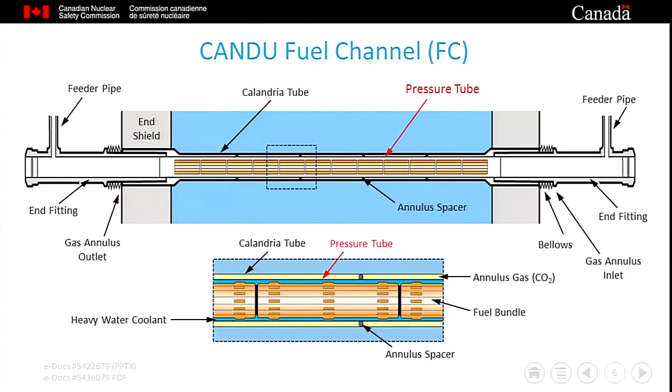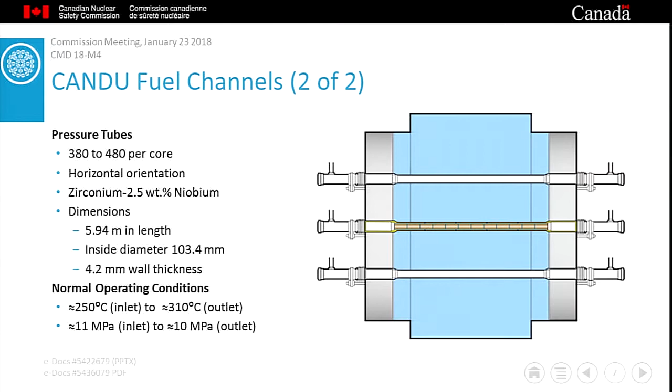The number of pressure tubes varies from as few as 380 in Pickering B units to 480 in the Bruce and Darlington units. Please see the appendix for more details about Canada's CANDU fleet. The conditions under which pressure tubes operate also vary according to the vintage of the reactor design, with lower temperatures and pressures in early CANDU units like Pickering A and higher values in the Darlington units.

First off, my apologies for the typo in this slide. I must have missed this. It's supposed to read technical concepts.

Before proceeding to a description of the pressure tube degradation and how CNSC staff regulates safe operation, I'd like to review some key concepts. Any conversation about pressure tube technology will touch on a number of interrelated themes. But rather than review all of them, I will touch on three. By doing so, I hope to offer some context for today's presentation, as well as prepare the Commission members for discussions they may hear during the upcoming Bruce and Pickering Part 1 hearings.

In the next few slides, I will briefly address three concepts. First, what do we mean by the phrase fitness for service? Second, I'll quickly discuss the presence of hydrogen in pressure tubes and the uptake of its sister isotope, deuterium. And finally, in any discussion about pressure tubes, people will frequently refer to two units of operating time, and I'd like to clarify the distinction.

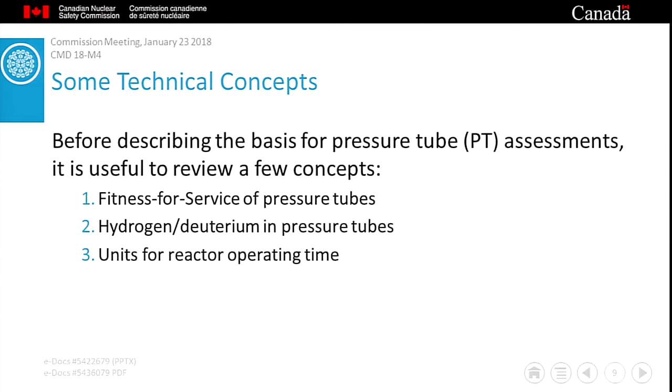The first concept is pressure tube fitness for service. In a CANDU reactor, high-temperature pressurized coolant flows through a number of components, collectively known as the primary heat transport system. Because this system is responsible not only for collecting heat from the nuclear reaction, but also efficiently transferring heat to the secondary system via steam generators, the integrity of the primary heat transport system is vital. This is especially true of the pressure tubes, which contain hot fuel. The CANDU safety case relies on pressure tubes to remain leak-free under normal operating conditions and to maintain fuel cooling under postulated accident conditions.

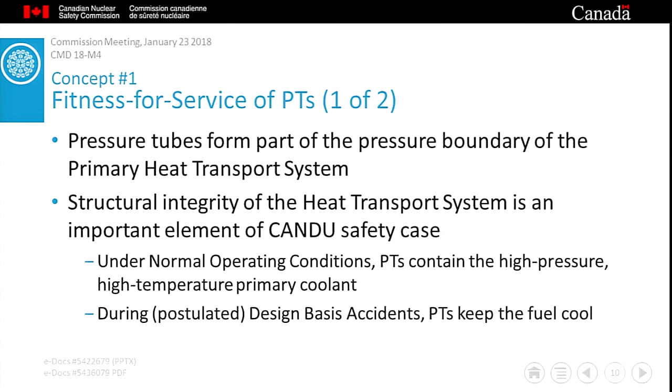When CANDU engineers designed pressure tubes, they had a specific goal in mind. Over their lifetime, the tubes would exhibit an extremely low probability of failure, irrespective of whether they were subject to normal operating conditions or accident conditions.

With this in mind, the engineers incorporated redundancies into the pressure tube design. First, they designed the pressure tubes not to leak. However, bearing in mind that pressure tubes might experience in-service degradation leading to a crack, the designers deliberately incorporated features to make pressure tubes resistant to unstable cracking.

Once pressure tubes have been fabricated, installed, and commence operation, one might ask, can they still perform the way that the designer originally intended? So when staff reviews a licensee's fitness for service assessment, our goal is to answer that question. Before leaving this slide, I'd like to clarify the phrase in-service degradation. For the rest of this deck, I will use it to describe degradation that occurs as a result of reactor operation.

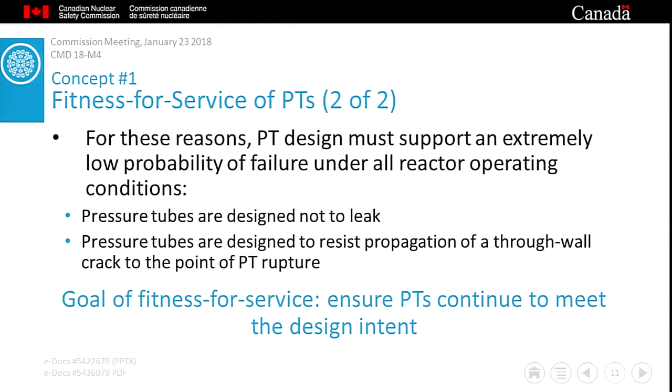At this point, it's important to distinguish between the 2 types of pressure tube assessments that CNSC staff review. First, assessments that are done to confirm that inspected pressure tubes are fit for continued service. In accordance with their license condition handbook, a licensee is obliged to conduct periodic inspections and compare the results against CSA acceptance criteria. If the inspection finding does not meet those criteria, the licensee must submit a fitness for service assessment for the inspected pressure tube for CNSC acceptance. These assessments cover approximately 30% of the pressure tubes in service in Ontario.

In addition, CNSC requires that licensees perform pressure tube risk assessments to address the 70% of tubes that have yet to be inspected. These assessments include 2 that I will describe in more detail in just a minute, namely leak before break assessments and fracture protection assessments.

Both leak before break and fracture protection assessments start from a worst-case assumption that somehow a crack has occurred in a pressure tube without operators being aware of it. The licensee then calculates the probability that the hypothetical pressure tube will rupture. All of the assessments must meet the acceptance criteria established in the compliance verification criteria of the License Condition Handbook. Based on the results of these assessments of both inspected and uninspected pressure tubes, CNSC staff assembles a composite view of the safety of 100% of the core.

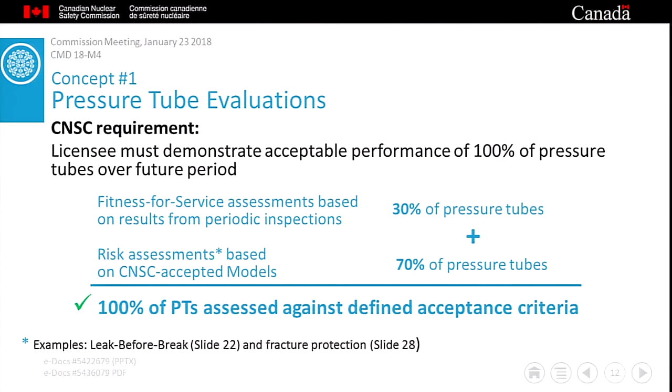As a second concept, I'd like to discuss hydrogen and deuterium in pressure tubes, because we'll see that this is an important issue in the concept of fracture toughness, which we'll be discussing in a minute. While there are 3 hydrogen isotopes, only 2 of them really have an impact on pressure tubes. Hydrogen, whose chemical symbol is a capital H, is built into every tube during its manufacture. And deuterium, symbolized by a capital D, is picked up by pressure tubes when they're in contact with high temperature heavy water.

Corrosion reactions result in two things. First, a thin layer of oxide appears on the pressure tube surface, and second, a small amount of the deuterium from the corrosion reaction finds its way into the tube. The amount of deuterium is so small, it is reported in parts per million. For simplicity, rather than talking about a given pressure tube having so many parts per million of hydrogen and so many parts per million of deuterium, industry rolls the two into a single value and talks about the hydrogen equivalent concentration, or HEQ. So for the rest of this presentation, you'll hear me talk about HEQ.

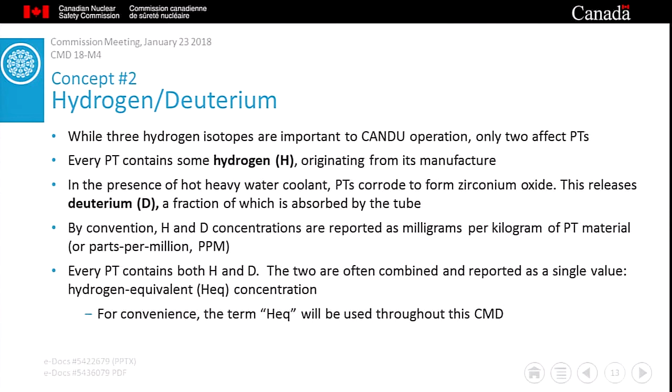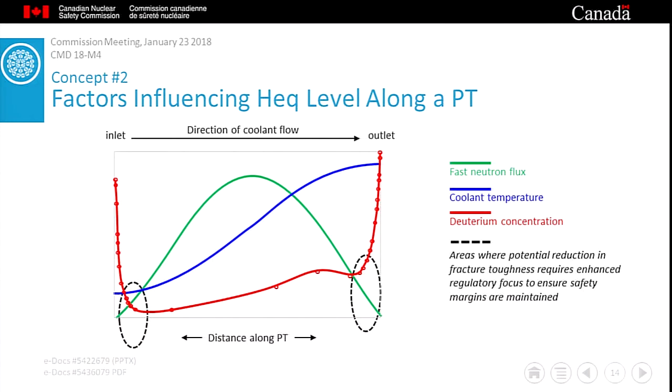Knowledge of this behavior is important for pressure tube assessments. In particular, hydrogen equivalent concentration is a key parameter for establishing the fracture toughness of a pressure tube. Hence, the circled areas at the end of the pressure tube indicate places that require enhanced regulatory focus because of reduced fracture toughness. And I'll be giving you much more detail on that in a couple of slides.

Finally, I'd like to distinguish between two units of reactor operating time that Bruce and Pickering representatives may use during the Part 1 relicensing hearings. Hot hours, which is the cumulative time the primary heat transport system is above about 200 degrees C, and effective full power hours, which is the fraction of the hot hours when the reactor is at full power. Each of these units has a slightly different application. To illustrate the difference between the units, the slide indicates the number of hot hours in a calendar year and the corresponding effective full power hours for a typical Canadian reactor.

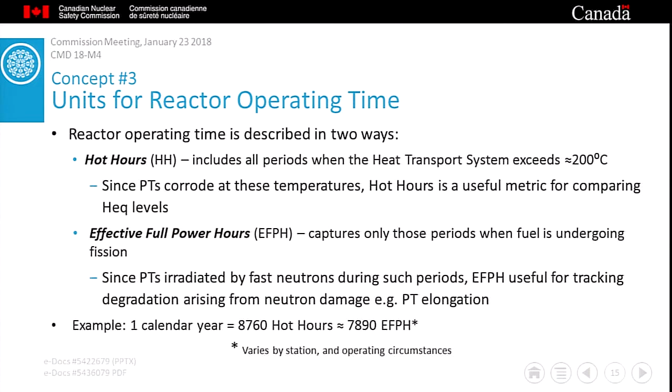Under the influence of high coolant temperatures, high pressure, and bombardment by energetic neutrons, pressure tubes experience a number of types of degradation. These include changes in dimension, for example, elongation of the pressure tubes, contact or interference with other reactor components, for example, the liquid injection shutdown system nozzles or LISS nozzles, flaws in pressure tubes, and changes in the material properties of the tube, such as fracture toughness.

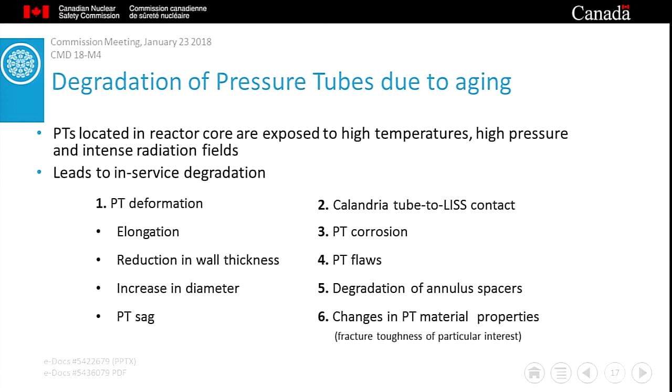It is important to recognize that when they designed the CANDU pressure tube, engineers took most of these degradation mechanisms into account. Specifically, they deliberately compensated for the potential impact of certain kinds of degradation by over-designing the tube.

I'd now like to switch gears from a purely technical discussion of how pressure tubes work and how they age to a summary of CNSC staff's oversight of licensee performance under the Fitness for Service Safety and Control area. This slide offers a high-level summary of key elements of CNSC's regulatory oversight of pressure tube degradation.

To comply with CNSC requirements, licensees are obliged to understand each pressure tube degradation mechanism, to make appropriate plans to assess the risk posed in their particular units by each mechanism, to perform inspections and material surveillance to confirm the extent and severity of the mechanism in their particular units, and finally, to use the collected data to demonstrate that affected pressure tubes will continue to meet acceptance criteria into the future.

And that's an important point. When staff looks at fuel channel fitness for service, pressure tube fitness for service assessments, we're not interested primarily in what's happening today. We're always forward-looking.

To illustrate how CNSC staff's oversight process works, I'd like to take a closer look at two examples. First, a form of degradation where CNSC requirements oblige the licensee to prepare a fitness for service assessment based on in-service inspection data. So for this example, we'll look at pressure tube flaws.

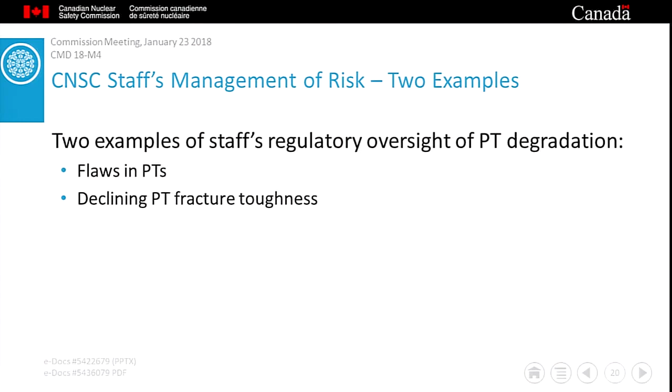Second, a mechanism that by its nature cannot be measured in service, and that's fracture toughness. As we'll see in a few minutes, licensees use predicted fracture toughness values as a basis for core-wide assessments of the risk of operating uninspected pressure tubes.

Let's start with example 1. The vast majority of pressure tube flaws are fairly innocuous. Once created, they exist as mere blemishes on the pressure tube surface, having neither economic nor safety implications. However, a very small fraction of flaws could potentially have serious consequences.

First, the flaw is created during normal reactor operation. If local stresses and the hydrogen level are appropriate, this flaw can become a small crack. And one mechanism capable of doing this is referred to as delayed hydride cracking, and that's symbolized as DHC. Under certain circumstances, this crack can grow through the pressure tube wall, allowing pressurized coolant to leak into the leak detection system.

Finally, under specific conditions, it's conceivable that that same through-wall crack could extend along the length of the pressure tube. And at this point, the CNSC defines two possible outcomes. We can either have leak before break, which is the target that all licensees are expected to meet, or we can have a condition referred to as break before leak.

Before we leave this slide, it's important to recognize two things about the Canadian fleet. First, no Canadian pressure tube has exhibited active cracking since 1986. And second, while some Canadian pressure tubes have demonstrated leak before break, only one tube has ever exhibited break before leak. That was in 1983, and it involved a pressure tube material that is no longer in service in Canada.

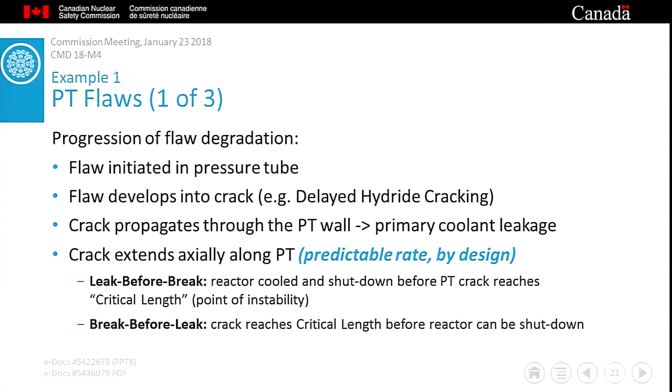This slide illustrates the progression of steps between initiation of a pressure tube flaw and a potential small break loss of coolant accident. Through careful consideration of this progression, CNSC staff has devised a series of regulatory barriers. Should a licensee wish to begin and continue to operate a pressure tube, each of these barriers must be successfully traversed. Each of the barriers has established acceptance criteria defined by the compliance verification criteria in the LCH.

In accordance with CSA standard N285.4, the licensee must periodically inspect a sample of their pressure tubes to look for flaws just like this. If the flaw meets CSA acceptance criteria, the pressure tube is considered unconditionally fit for service. On the other hand, if the flaw does not pass those criteria, the licensee must submit a fitness for service evaluation, basically a detailed assessment of the risk that the flaw could initiate delayed hydride cracking at some point. The assessment not only covers the present time, but a defined period into the future.

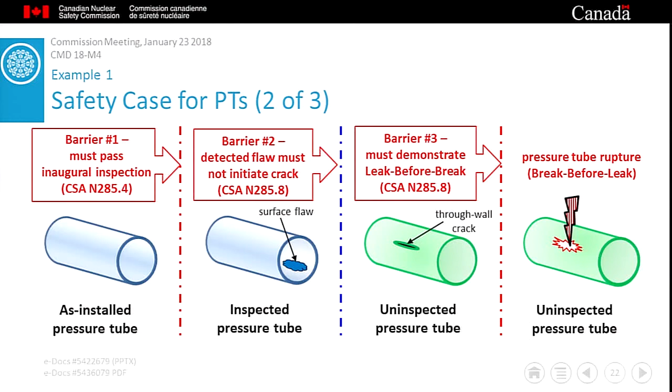Notable examples include the preparation and submission of periodic inspection program plans, which detail the scope and schedule of pressure tube inspections, and the preparation and submission of fitness for service assessments done in accordance with the CSA standard and providing detailed analysis supporting a claim that the pressure tube can be safely operated into the future.

We have now seen how CNSC staff assesses one type of degradation identified during periodic inspections of pressure tubes. I'd now like to contrast that with a second kind of assessment, aimed at quantifying the risk of continued operation of pressure tubes for which no inspection data is available. One example of this is fracture toughness, a key property of pressure tubes. At this point, it's important to re-emphasize an earlier comment. While pressure tubes are designed to be leak-free for life, CANDU designers allowed for the remote possibility of a crack. They deliberately built in features that would resist the growth of a through-wall crack, irrespective of how it got there. Fracture toughness is a measure of that resistance.

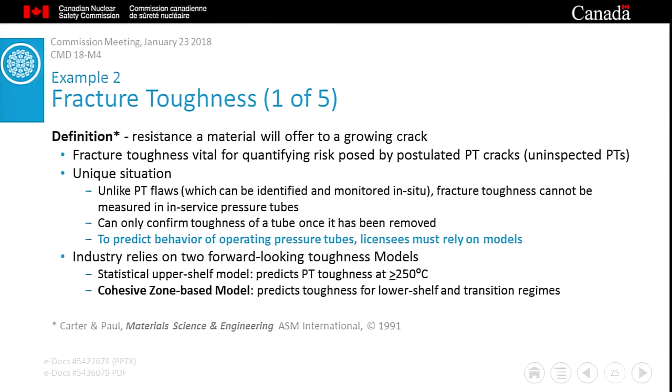A good analogy is a garden hose. In the middle of the winter, for example, when you're flooding a children's hockey rink, the hose would easily rupture if you accidentally opened the tap a little too quickly.

However, when spring temperatures arrive, a sudden pressure increase might make the hose leak a little bit, but it would not rupture. Returning to the example of reactor pressure vessel steels, once the material reaches upper shelf temperatures, it exhibits purely ductile behavior. The fracture toughness is quite high, so even if a crack existed, the tube would resist its growth. Under these conditions, the crack will not grow unless the load is increased.

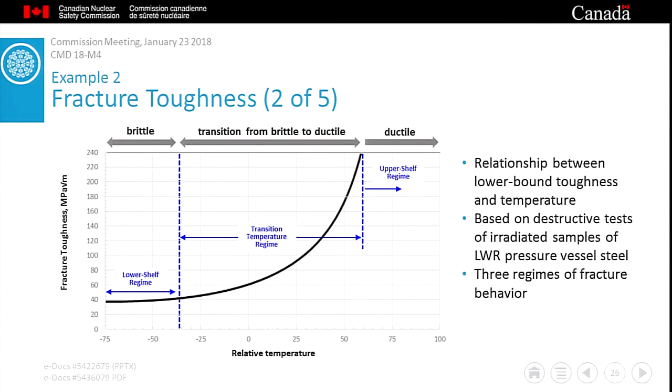This last regime is where CANDU pressure tubes need to be operated. This ensures that the crack resistance of the tubes will be at a maximum in the event of a design basis accident. One might ask, do Canada's pressure tubes still have sufficient toughness to safely perform their design function? And the answer is, for the near term, yes.

However, research and development has confirmed that as hydrogen equivalent levels continue to increase, pressure tubes will exhibit a steady reduction in toughness. To manage the risks associated with this decline, licensees must consider two requirements. First, during normal operation, 100% of the pressure tubes must be on the upper shelf. Fortunately, research has shown that neither hydrogen levels nor temperature affect the pressure tube behavior once you're on that upper shelf.

However, when pressure tubes are operated below 250 degrees C, for example during the heat up and cool down of the reactor, the situation is more challenging. Based on a detailed understanding of how toughness changes with both hydrogen content and temperature, operators must carefully control heat transport system pressure to ensure that at each step, pressure tubes will be sufficiently tough.

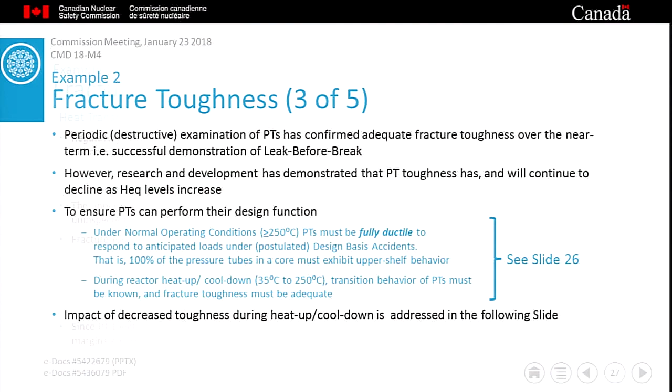I'd like to take a moment to focus on that particular scenario, the heat up and cool down of the reactor. To ensure that they can meet a key CNSC requirement, licensees establish a so-called heat up cool down envelope, which operators must observe as they pressurize and depressurize the heat transport system.

To create this envelope, licensees employ a fracture protection assessment, which determines the maximum pressure that a postulated crack could sustain without becoming unstable. So again, I have to emphasize, this is looking at the worst case scenario. You have a crack in a pressure tube and you have not identified it. So to develop the heat up cool down envelope, the licensees start by assuming that there is a tube out there that has that crack.

A key input to this assessment is fracture toughness. As I mentioned earlier, the temperature range over which heat up and cool down occurs, known as the transition regime, is tricky because the toughness varies both with temperature and with hydrogen equivalent level. Early in life, it was pretty straightforward to devise a heat up and cool down envelope. Pressure tubes contained only a small amount of hydrogen, so they were pretty tough.

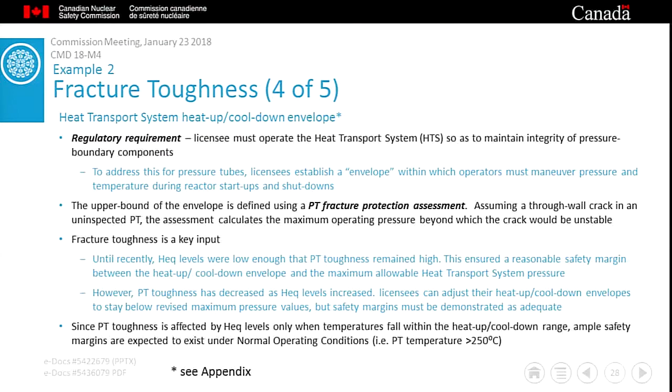In contrast, steady increases in pressure tube hydrogen equivalent levels make the current situation a bit more complicated. With falling fracture toughness levels, licensees have found it more difficult to define a heat up cool down envelope that will allow them to pass a fracture protection assessment. In monitoring licensee management of this challenging situation, CNSC staff focus on the size of the safety margin, and that is the amount of space there is between the upper bound of the heat up cool down envelope and the maximum allowable pressure that's determined by a fracture protection assessment.

Finishing off with fracture toughness, I could repeat a similar table to what was shown in slide 24. But in the interest of time, I can simply confirm that the regulatory requirements governing pressure tube risk assessments are quite similar to those imposed on licensees when they do fitness for service assessments. And second, I can confirm that licensee performance in doing these risk assessments reflects a level of effort and focus comparable to the level that they devote to addressing fitness for service assessments.

Finally, I'd like to take this opportunity to compare CNSC staff's evaluation of the 2014 licensee request to operate beyond 210,000 effective full power hours with their current requests, which the Commission will be examining in the coming months, and that is to extend pressure tube life to beyond 247,000 EFPH.

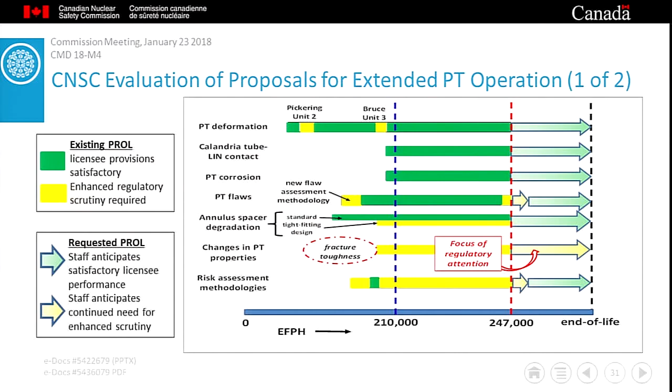Taking the issues in turn, with respect to degradation of tight-fitting spacers, industry has devoted considerable time and effort to this issue, and over the past 6 years it has borne fruit. Industry has removed and carefully examined in-service spacers, developed a suite of predictive models for their degradation behavior, and has begun preparing fitness for service procedures for publication in a Canadian Standards Association document. In short, staff rates industry's current performance as green, and we do not anticipate any downturn in industry's performance on this particular item.

In terms of proposed new methodologies for flaw assessments, leak before break, and fracture protection assessments, industry has submitted several technical basis documents and engaged in extensive meetings to address CNSC staff concerns. Based on this, 2 assessment methodologies have been accepted for use, and CNSC staff's review of a 3rd methodology is nearing completion. Overall, CNSC staff is confident that following a continued but brief period of enhanced regulatory monitoring, we will be in a position to rate industry's performance as green.

Finally, with respect to fracture toughness. While industry has completed considerable work over the last 4 years, there are outstanding issues with one of the models that they are currently using, for example, the treatment of uncertainties. As well, there are new issues, including the development of an extension to that model capable of predicting fracture toughness out to 160 ppm hydrogen equivalent, which is the new end-of-life target. For this reason, CNSC staff believes that this issue must remain yellow, and this will be reflected in the Commission member documents that you will be reviewing leading up to the relicensing hearings.

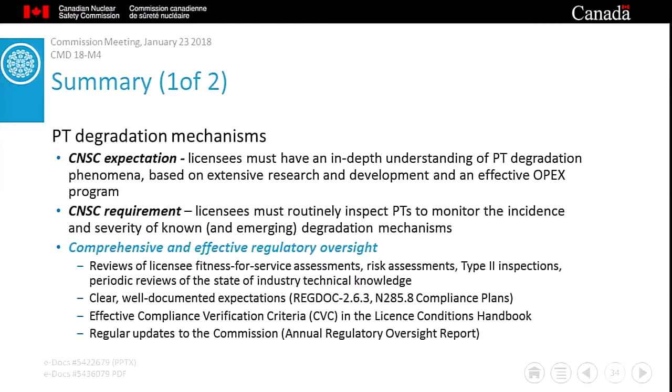To ensure licensee fitness for service programs for pressure tubes meet regulatory requirements, CNSC has a comprehensive and effective approach to oversight. We expect licensees to have an in-depth understanding of pressure tube degradation, and we require routine inspections of pressure tubes. CNSC staff has a comprehensive and effective regulatory oversight, and in particular over the proposed 10-year operating license requested by OPG and Bruce Power, staff intends to provide annual updates to the Commission via the regulatory oversight report.

In terms of fracture toughness, CNSC staff can confirm that research and development on the toughness issue continues under the joint Bruce Power OPG CNL project. Since the time licensees first requested Commission approval to operate pressure tubes beyond 210,000 effective full power hours to the present, CNSC's regulatory expectations have not changed. That is, licensees must routinely demonstrate that pressure tubes remain capable of meeting all of the original design intent. And finally, should the licensee propose revised or new fracture toughness models in support of future pressure tube operations, CNSC staff will expect them to demonstrate that the predictions are conservative.